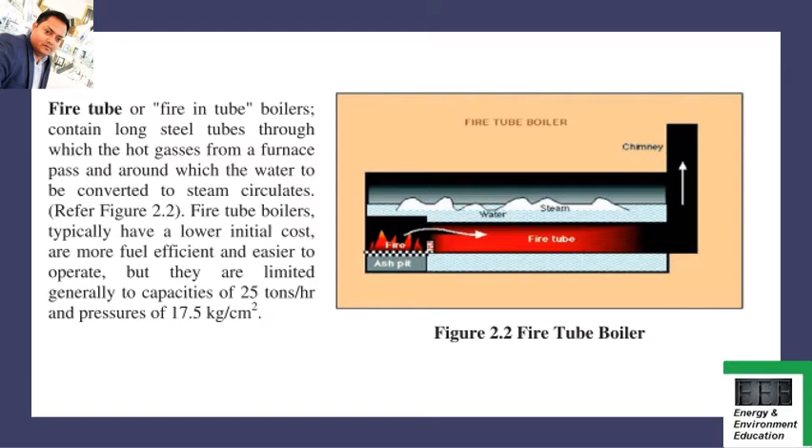Now, if you consider the water tube boiler, it's just opposite of the fire tube boiler. In this case, what is happening here? Inside the tube, the water is present, and outside the combustion takes place. So, water tube boilers or water in tube boilers are those in which the conditions are reversed, with the water passing through the tubes and the hot gases passing outside the tubes.

Just the reverse of the first one, where in the fire tube boiler the gas was passing inside the tube. Here the water is passing inside the tube. There the water was outside. Here the water is inside and the gas is outside. So it's just the reverse of the fire tube boiler, that you can understand.

These boilers can be built to any steam capacities. So if you are asked to compare the water tube boiler with the fire tube boiler, you can see the fire tube boiler has some limitations, up to 25 TPH or something. But in the case of the water tube boiler, there are no capacity limitations and pressures, and they have higher efficiencies than the fire tube boilers. So this is a major difference between the water tube boiler and the fire tube boiler.

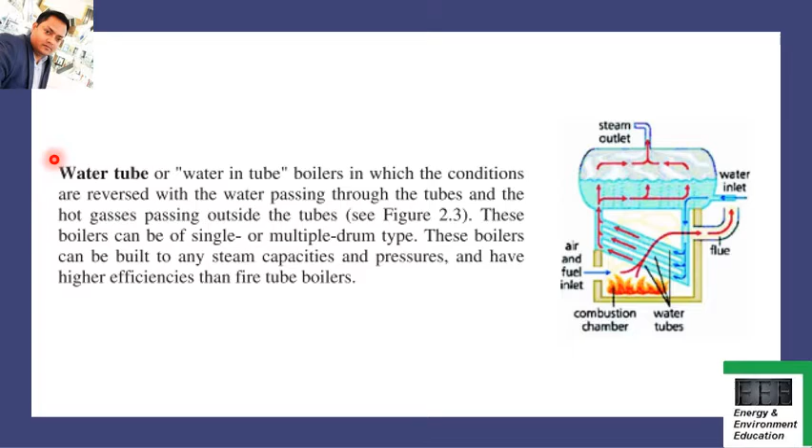So they may ask you either to differentiate between the water tube boiler and the fire tube boiler, or they may ask you separately to explain the water tube boiler or the fire tube boiler, friends. So this is very much important for you to understand.

Now comes the third type, the packaged boiler. The packaged boiler is so called because it comes as a complete package. So as the name suggests, it's in a complete package. You're getting everything here. Once delivered to site, it requires only the steam, water pipe work, fuel supply, and electrical connections to be made to become operational. So everything is happening at a single location.

It's in a package form. The burning takes place there only. The steam is generated in the same equipment, friends. So there is no separate equipment for different functioning. Everything is done at a single place, single equipment, friends. So it's called a package boiler. Package boilers are generally of shell type with fire tube design so as to achieve high heat transfer rates by both radiation and convection.

They may ask you in a question to explain what a package boiler is all about and name some of the features of package boilers. First, a small combustion space with a high heat release rate, resulting in faster evaporation. Second, a large number of small diameter tubes leading to good convective heat transfer. Third, a forced or induced draft system resulting in good combustion efficiencies. So all these things you have to remember, friends, and learn.

A number of passes resulting in better overall heat transfer. Higher thermal efficiency levels compared with the other boilers. So these are the 5 features which separate the package boiler from the other boilers. So when you write in an exam about the package boiler, if you explain these features a bit, that will help you have a better answer in the exam, friends. So it's very much important as far as I'm concerned.

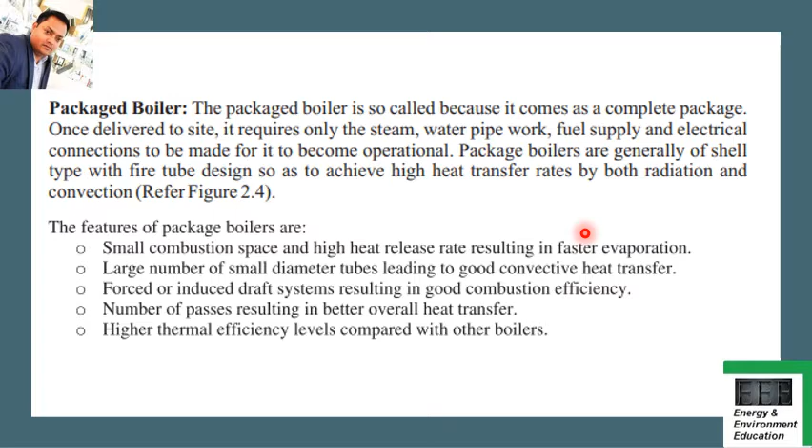Now there are other boilers also, which are categorized by how you feed the fuel. Suppose a stoker fired boiler. In this case, stokers are classified according to the method of feeding fuel. This is a very much important term: how the fuel is fed inside the boiler. So we are not concerned here with how the steam is generated. We are only concerned with how the fuel is fed inside the combustion chamber of the boiler.

So that is more important here. So basically there are two types of stoker fired boiler. The first one is chain grate or traveling grate, and the other one is a spreader stoker. So these are two types of stoker fired boiler, where the category differentiates the boiler from other boilers basically in terms of how you feed the fuel inside the furnace of the boiler.

So chain grate or traveling grate stoker boiler, here the coal is fed at one end of a moving steel chain grate. So you can see here from one end the coal is fed and it carries it inside the furnace chamber, friends, where the combustion is taking place. So coal is fed at one end of a moving steel chain grate. As the grate moves along the length of the furnace, the coal burns before dropping off as ash.

So it's not very difficult to understand this concept, friends. We are not showing here the steam part. We are just showing the combustion part, because the category of this boiler is basically defined by how the fuel is fed. So the way you feed the fuel inside the furnace chamber of the boiler, that is your only concern in categorizing this boiler.

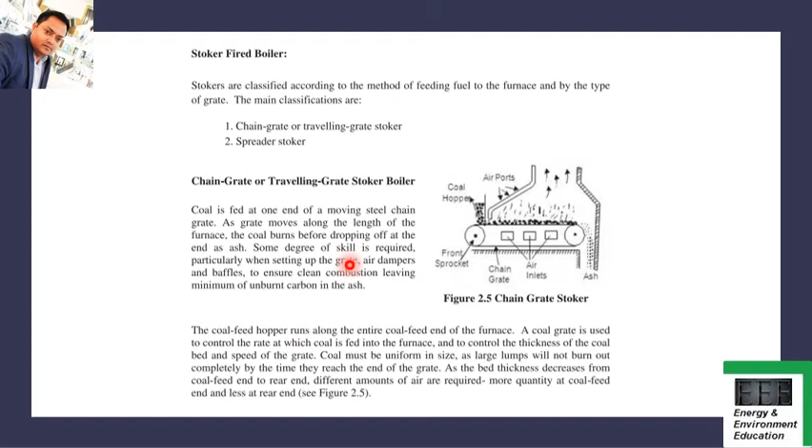So you see here the coal is fed from one end and it passes through the entire furnace chamber, and once it moves on, it starts burning and finally it drops off as ash. This is the principle of the chain grate or traveling grate stoker boiler, friends.

Now coming to the spreader stoker boiler, this is also important and very easy to understand, but its working principle is a bit different from the one I showed in the last slide. Basically, you are feeding the coal as a suspension, because here burning takes place in two ways. One is at the grate, this is the grate here, and the other one is the suspension part.

So the lighter, smaller coal particles are burned in suspension here, and the heavier part of the coal comes to the coal bed where the burning takes place. So basically, the spreader stoker utilizes a combination of suspension burning and grate burning. This is the suspension burning taking place, and this is the grate burning. The coal is continually fed to the furnace above a burning bed of coal.

The coal fines are burned in suspension. So whatever coal fines are there are burned here in suspension, while heavier parts come to the coal bed where the burning is taking place, friends. So this method of firing provides good flexibility to meet load fluctuations, since ignition is almost instantaneous when the firing rate is increased.

So as soon as you feed the fuel here, it starts burning, because there are two types of burning taking place. It doesn't wait for the grate to burn. The fines start burning here in suspension, so it helps you to meet any load fluctuation, friends. So this process is very important to understand, friends. Hence the spreader stoker is favored over other types of stokers in many industrial applications.

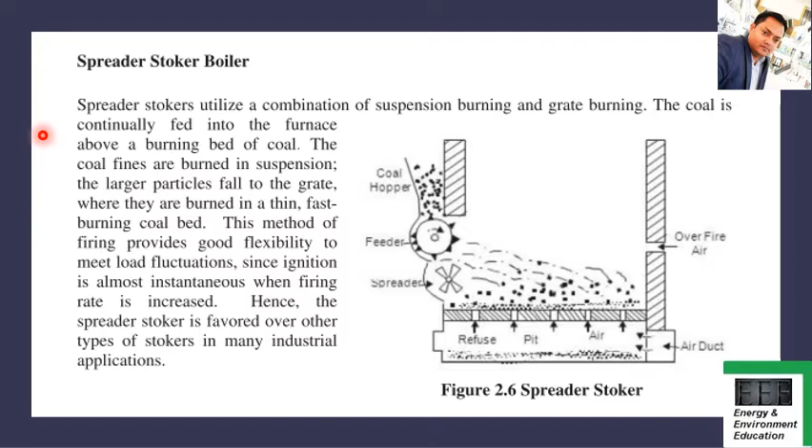This is the reason why this type of burning is efficient and also preferred over the other burning type, friends, that I have discussed. So this is the spreader stoker boiler, friends, that you must understand from the exam point of view.

Another important type of boiler is the pulverized fuel boiler. If you see the name only, you will understand what it is all about. Basically, you are using a pulverized fuel. This means any fuel like coal, you are using in a fine powder form. You are first pulverizing the coal, then feeding it into the burning chamber, friends.

So most coal-fired power station boilers use pulverized coal, and many of the larger industrial water tube boilers also use this pulverized fuel. So basically, you are using the fine powdered form of the coal in a burning furnace, friends.

The pulverized coal is blown with part of the combustion air inside the boiler plant through a series of burner nozzles. Secondary and tertiary air may also be added. Combustion takes place at temperatures from 1300 to 1700 degrees centigrade, depending largely on the coal grade. So basically what's happening here, you are using the fine powdered form of the coal while feeding inside the burning chamber, and the temperature here is around 1300 to 1700 degrees centigrade.

This is also an important part for you to understand. In the exam they may ask you a one-word type question, or fill in the blank question. They may also ask you to explain the entire pulverized fuel boiler. So you should understand the working principle of the boiler, where the coal is used in fine powder form, and then it is fed inside the combustion chamber.

This system has many advantages, such as ability to fire varying quality of coal, quick responses to changes in load, and use of high preheat air temperatures. These are some of the advantages of this pulverized fuel boiler. They may ask either to explain the pulverized fuel boiler working principle and the advantages, or they may only ask you to give the advantages of the pulverized fuel boiler, friends. So you must understand and remember these advantages of the pulverized fuel boiler.

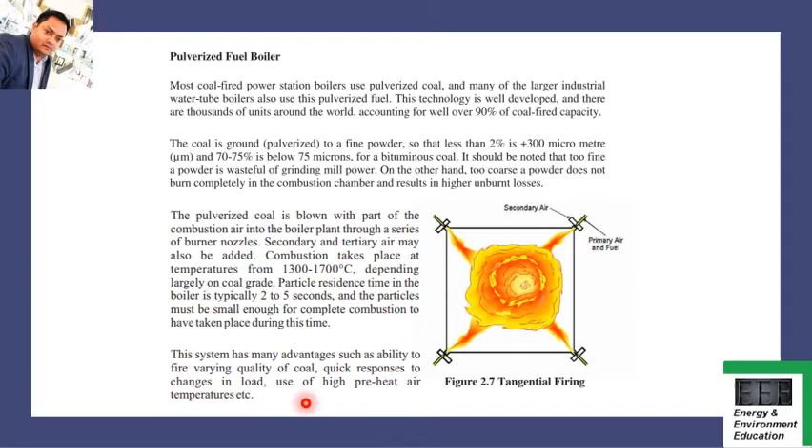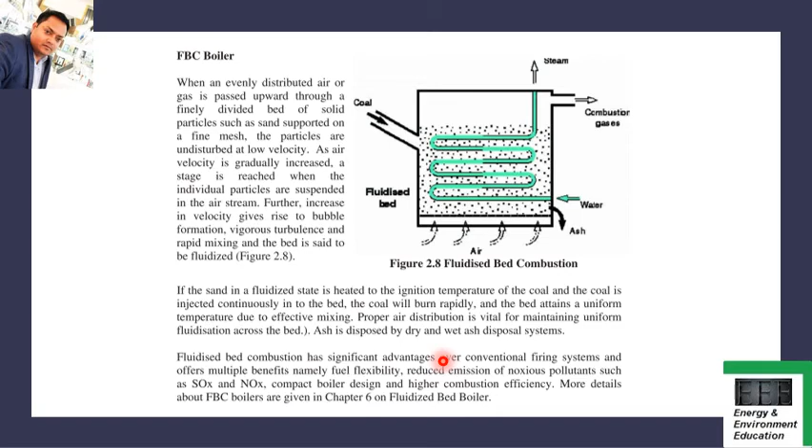Also, the SOx NOx part is coming again and again in the exam as an objective type question, friends. So it is very much important for you to understand the entire concept, the working principle, and the advantages of the FBC boiler, friends, and the SOx NOx part. This may come in the exam, you must understand, friends.

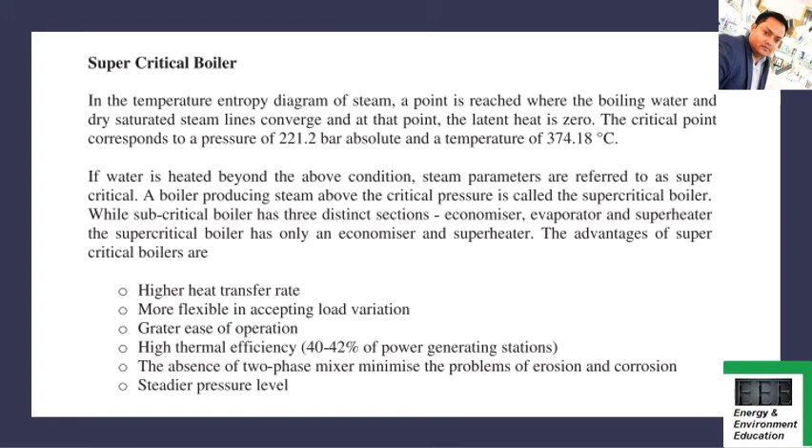So with this I'm ending part B, friends. I hope this part B has given you some insight about the different types of boilers that I have tried to explain in a very simple, brief manner with easy explanations, friends. I hope these things will help you in the exam. Part C of this chapter will now follow this part B.